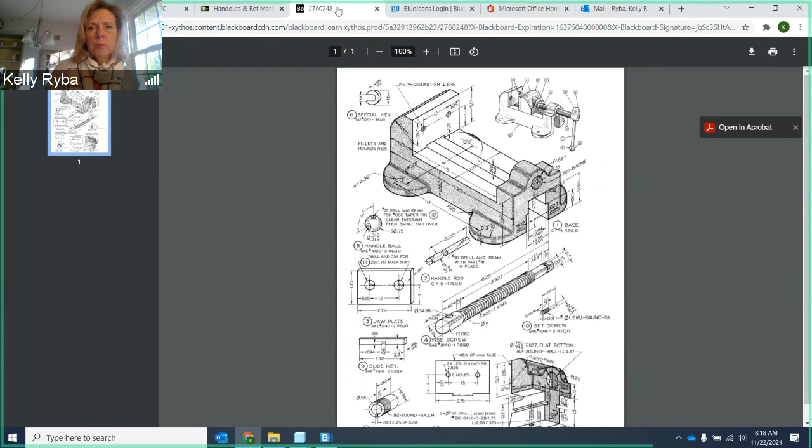So for the first draft drawings, and when you create your model, you're going to be drawing to the basic sizes that are listed here, okay? And if you're wondering which one to do it for, you also have available to you a folder in here in the handouts and reference materials of the first draft drawing guides. So if you click here, for instance, we're going to be looking specifically at the base drawing today. This is what your final drawing is going to look like, okay?

So if you're wondering, okay, what numbers should I make those features to? Oh, on Kelly's guide, here it is, okay? So use this so that as you're creating your model, and ultimately when you're creating your drawing, you have all the elements that are needed, all right? I have these guides out here because you guys had Connie previous to this, so she ran things just a little bit differently, and I have different expectations. So I want to be sure that you know what I'm looking for, and I think the best way to do that is to show you.

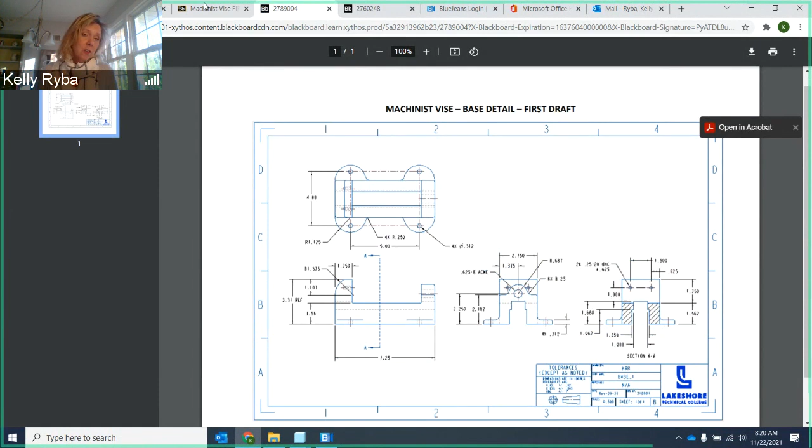Now, ultimately, you have to create the model. You have to create the final drawing. You can't just hand in my PDF here. So you may say, well, you're giving us the answer. I'm giving you what I want. And when you go to a company later on, they're going to be giving you things like, this is what I want, but you have to change this, that, and the other. Okay? So that's really what I'm doing for you here. I think you need to have good things to reference so that you can make good drawings. It's one thing to know the rules, but how is that supposed to look? What do I need that Kelly is going to be looking at and grading?

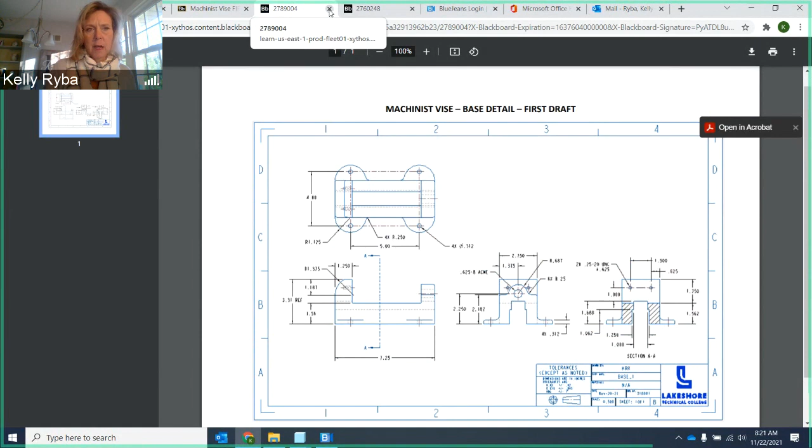So I'm kind of your boss for the company you're working for, telling you this is the format that I want. So here is what I call the drawing guide for your first draft of the base. Now there are going to be things that change on here. There's going to be a second draft on the base because we're going to be looking specifically at fits and such, okay? So that's coming soon. But right now, just focusing on first draft models and drawings, and that's what's in this drawing guides folder, okay?

So let me just go back to handouts and reference materials. In addition, the bill of material and assembly planning sheet in PDF format and Excel format are also here. These are referenced in lecture number 1. Make sure you go back and do that. That is required, and that's due tomorrow night. And then we also see a Starrett tap drill chart here. Starrett, however you want to say that. I hear it both ways.

Okay, so let's go back one level. Oopsie, actually I wanted to go to the machinist vise level. And then what I want to show you is the folder for the homework. There are, it looks like, 4, 5, 6, 7 homework assignments here, but there aren't that many due dates. I'm going to tell you that. So bill of material and assembly planning sheet here.

This is going to be due tomorrow night, all right? Or look on the calendar, depending on when you're watching this. And then you'll notice that I have 3 packets here of first draft drawings. Since there are 10 drawings, I didn't want you handing in all 10 at once.

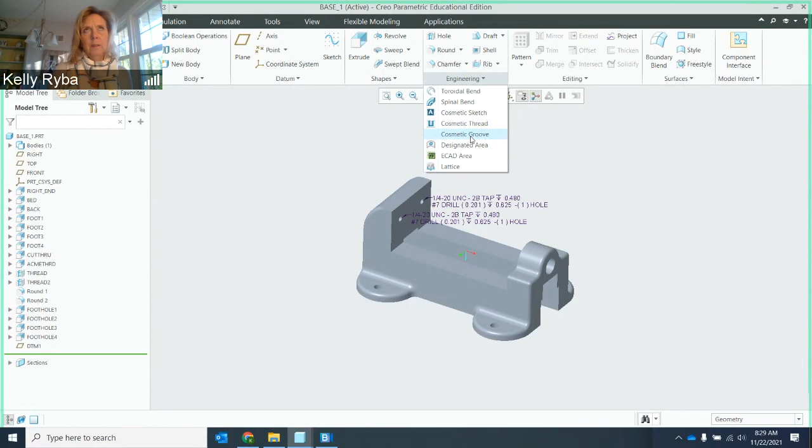All it offers you is on the diameter, it allows you to create the note, and you can just put the note in yourself. So if you wanted to go through the cosmetic threads process, go ahead. I am not going to be adhering to that because to me, that's another level of unneeded detail.

On the drawing level, I just have to make sure that my note specifies everything that's needed, because functionally, we don't need the threads there. We just need an accurate note.

In Creo, we're not going to worry about modeling or even showing a simplified version of the threads themselves. We're just going to draw the nominal size hole or nominal size shaft diameter, and our note is going to depict exactly what the thread callout will be. That's how we're going to handle that here in Creo.

Lastly, I wanted to talk about section views. Section views are going to be added for a number of our prints, and they're needed because we have to be sure that we are not dimensioning to hidden features.

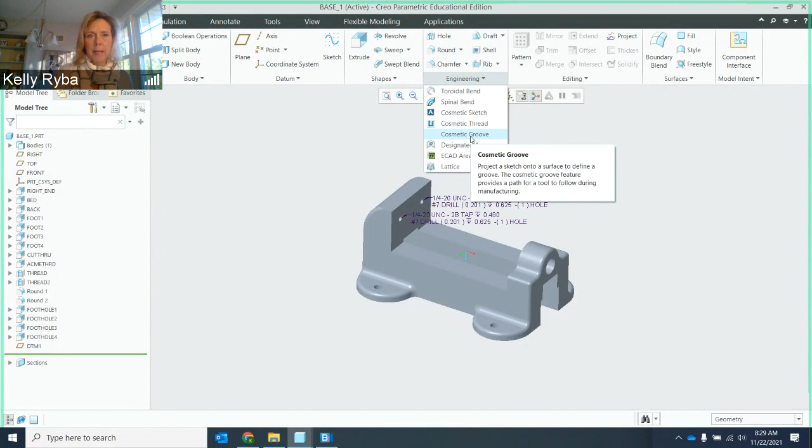There are two places where they're specifically needed, and that's going to be in the base, which I have up here and already modeled, and we're also going to be using them in the sliding jaw and maybe one or two other places.

I want to preface this: as we are creating our models, we will need to put some datum planes in here so that when we create our section views later on, we make sure we have the datum planes already set up in the model.

It's harder to do it in the drawing itself, so we have to kind of think ahead. If you forget to do it, you can always go back to the model, add it, save it, and it'll come up in our drawing because we know they're parametric. So that's something to consider as well.

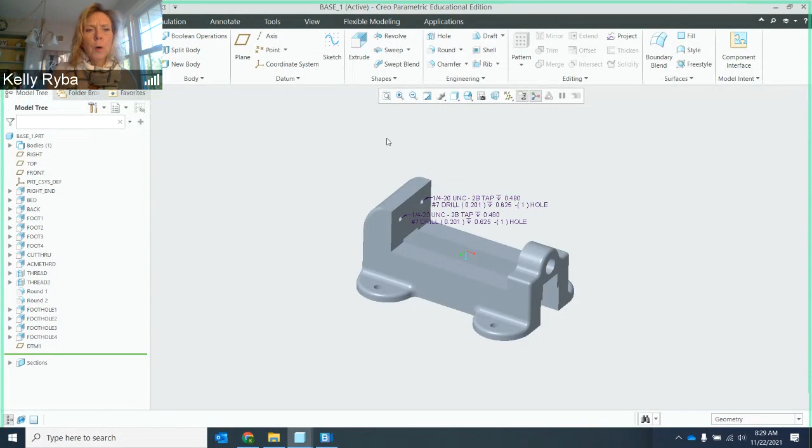I just want to make sure. All right, so a couple things here. I created my model for my base, so I'm starting here with my base model. Basically, as we look around here, this mimics exactly everything that I have on my pictorial view here.

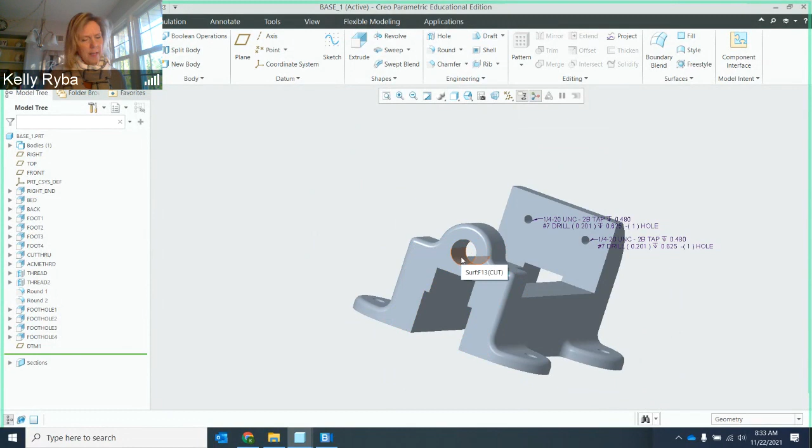When I created this hole right here, this is the Acme thread. I created it to a size of 5/8 of an inch, 0.625 diameter. Notice that there is nothing but that major diameter of that thread there.

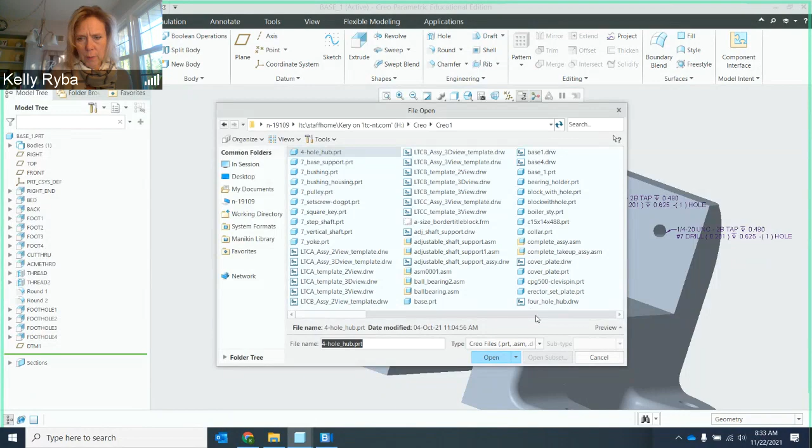When we put the vise screw in place, let me open up that and show you that as well. The vise screw, the portion that is threaded - now I haven't done the drawing for this one just yet, but this portion is not modeled with teeth.

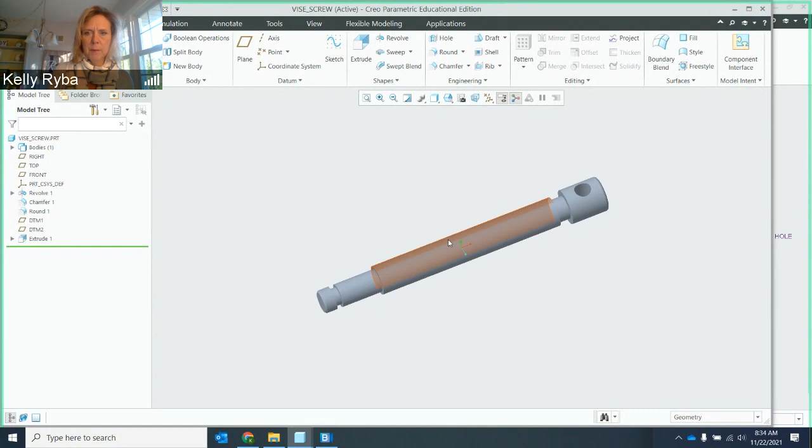But when I create the drawing, I am going to point to this section and it is going to have the callout for the Acme threads that would correspond and mate with this hole right here. So again, notes only is how we're gonna call that out.

If you wanted to take the time and go through it, that's totally up to you. No extra credit, no extra points, no nothing for that, because to me, it's not time spent efficiently. We have to kind of manage our time like this - there are due dates here, and there's what do we need to manufacture the part?

We need to know how far, we need to know where it's located, and we can get that across without having to model to that level of detail. So notes only for threads, whether they're external or internal.

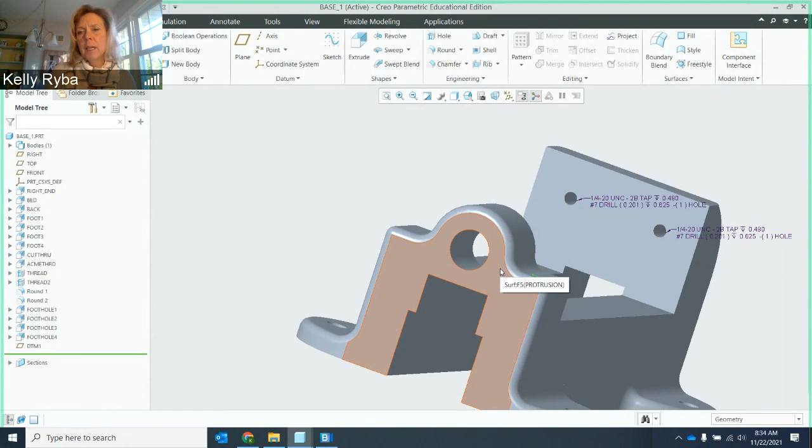Now, you'll notice here too, I'm gonna actually use this as an example. I put this threaded hole in as the hole wizard. And you'll notice that it has the full callout here, but it doesn't show the threads - cosmetic only. All right, so that's the deal there.

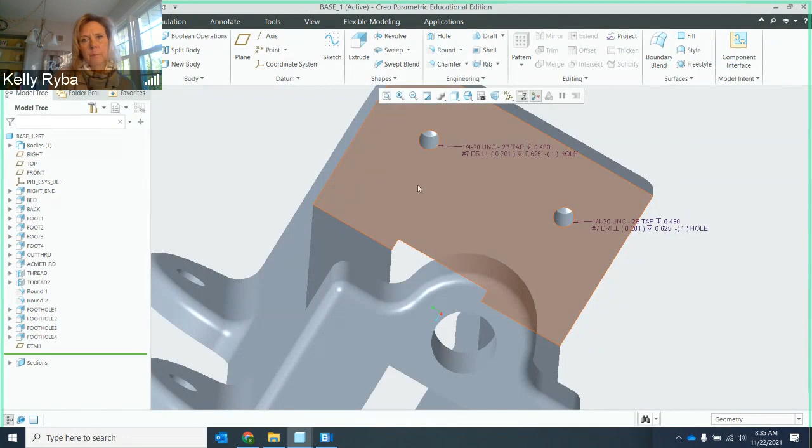Now, as I look at my detail drawing for the base - detail drawing for the base. Let me go back over. Actually, let me minimize this.

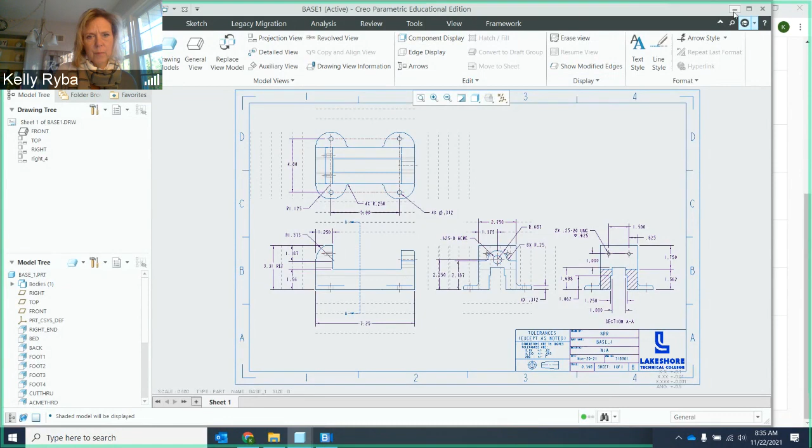Out of that. Here is my detail drawing. Oh, this is this guy. I actually wanted the - I wanted this one. Okay, no, I don't want that one. Dang it. I need and want my machinist vise, handouts and reference. I want the drawing guide for the base.

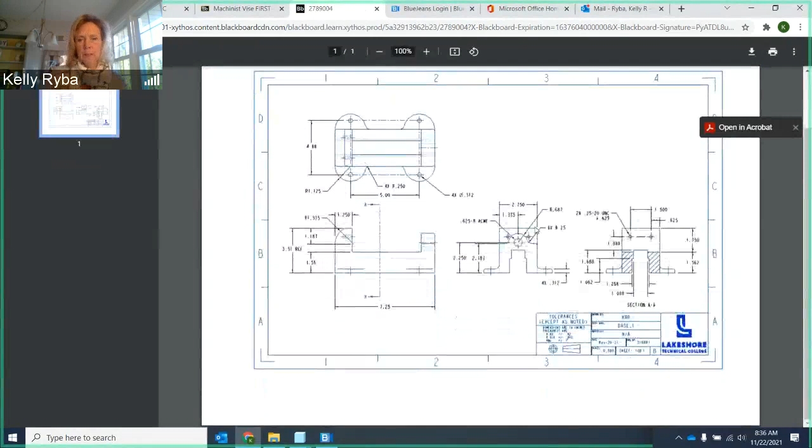I want this one. Okay, I want this guy right here. Now, you'll notice that I have a section view right over here.

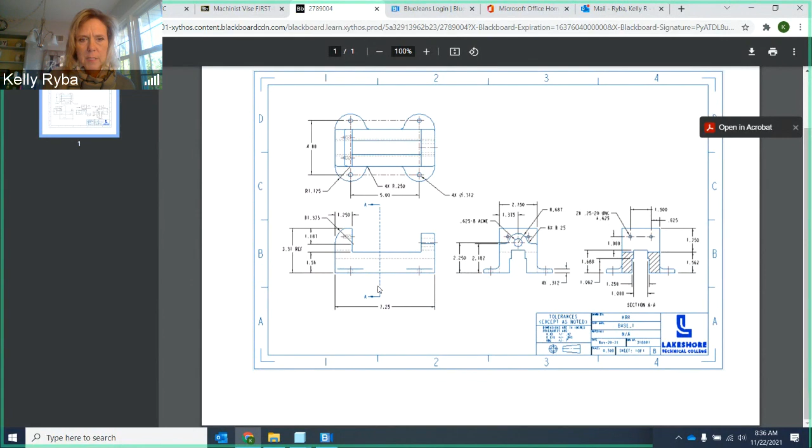Now, as I'm in my model, I'm going to think ahead. If you don't do this until you start your drawing, you can always go back to the model and create it. But I'm going to show you how I put in a datum plane for the placement of the actual section. So let's go back to this guy right here.

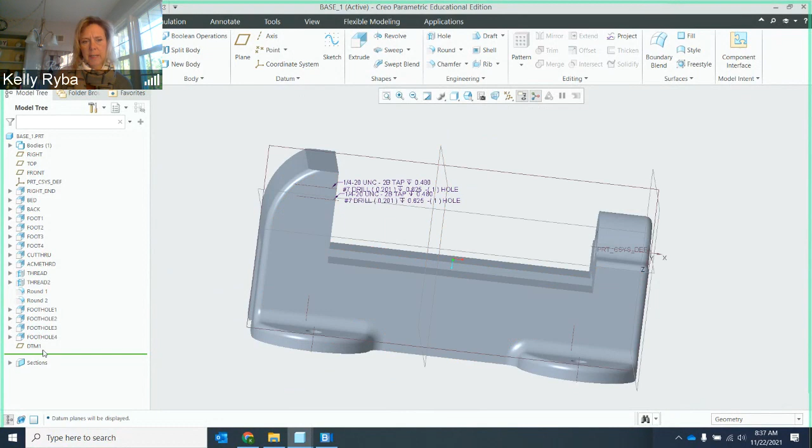Now I have my datum plane in there, and it's in between this area right here on what I call the bed. And that datum plane, if I show my datum planes, it's this one right here, called datum plane number 1.

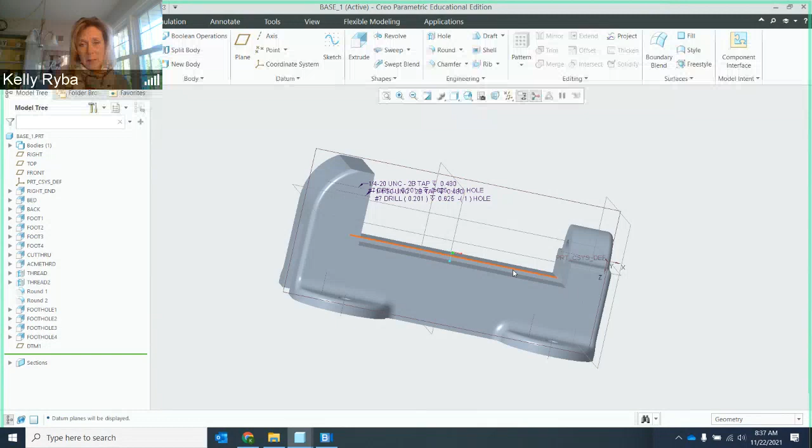Now, if my section corresponds to an existing standard plane, so if it's top, front, or right side, I don't have to do this because I can select it in my drawing. But if it doesn't, like in this case, it needs to be along the bed here somewhere, then I need to put it in place. So what I'm going to do is show you how to put a datum plane in place, and it's really simple.

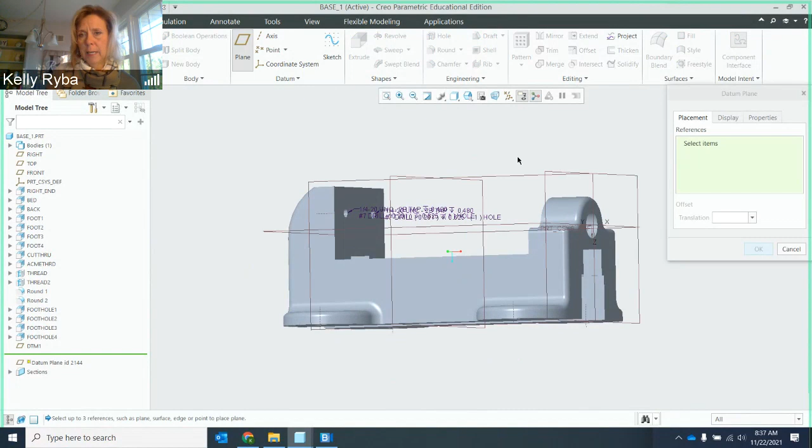All I'm going to do is click on the plane, and I need to figure out where a reference plane or surface is that I want to go in relationship to. So I'm going to say I want it to be in relationship to that face right there.

So that's surface 7, and I want this plane to be offset a distance into where that bed is. I'm going to leave this at offset, but I could do a through, a parallel, a normal, a midplane, whatever it might be. So I'm going to do offset, leave it as is.

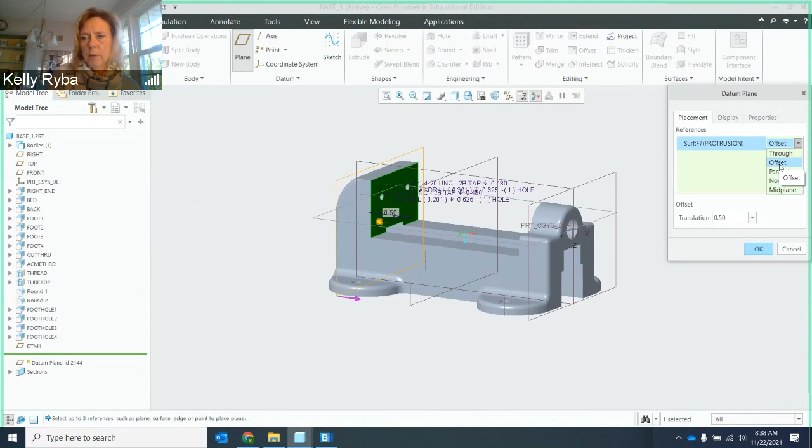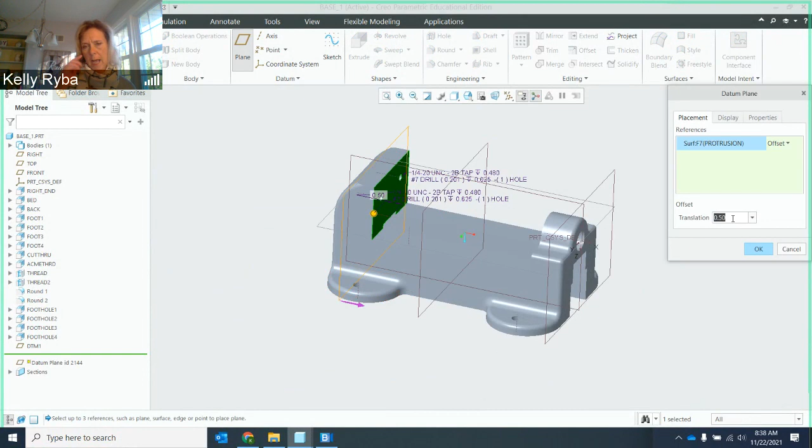And then you'll notice now there is a purple arrow. That purple arrow is telling us the direction that whatever number we put is going to go from that reference plane, surface F7, and it's going to go to the right. So that means I want this to go to the right into my bed.

Now, I think what I put last time was either 2.5 or 2 or something like that. So I'm going to offset it so we can see the difference. I'm going to put it at 2.75, and I'm going to hit enter. It went the opposite way, it went to the left. Dang it, we're going to try that again.

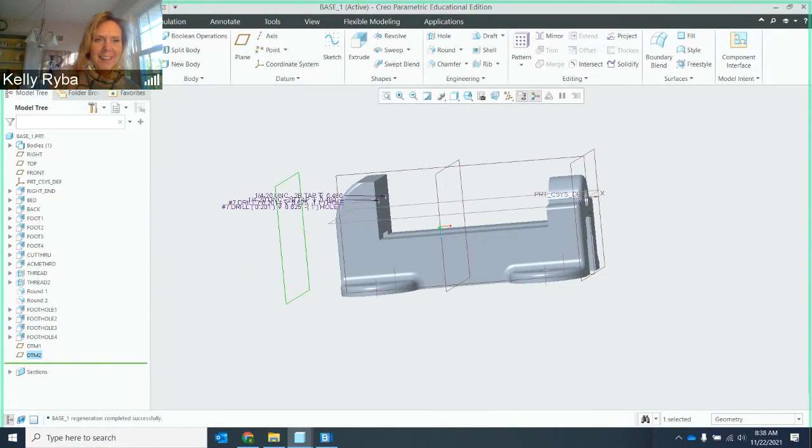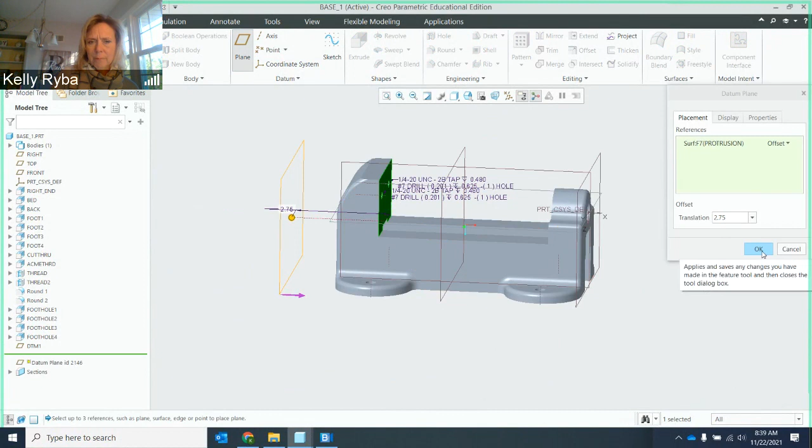This is the beauty, the challenge of Creo sometimes, or any CAD system. That means I have to put a negative in front of the number. So I'm going to select my surface, I'm going to have offset, and I'm going to do negative 2.75. You little thing, right? Negative 2.75. There it goes. Okay, now I don't understand why it showed the picture originally over here, but whatever.

But now you'll notice that I have an offset right here. This was the new plane that was created, and this is DTM, datum plane number 2, or datum 2. So now I have that plane in there. I'm going to file, I'm going to save.

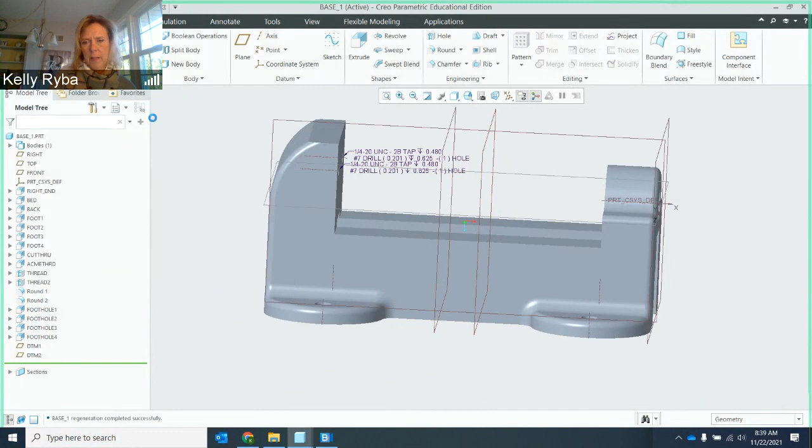So if I go to my drawing of this base, that's right here. I'm going to turn off my planes first, and I'm going to go over here and look, and I'm going to turn my datum planes back on. So you'll notice in this view, I have a plane right where my cutting plane is. That was the original datum plane that I put in there that was used for the section.

Now we're showing the second plane here. This is the one I just put in at the 2.75, from this surface over to the right. And then I can turn those off if I don't need them, and they go away. All right, so now I've got that plane in there.

And what I'm going to do is demonstrate how to make another view.

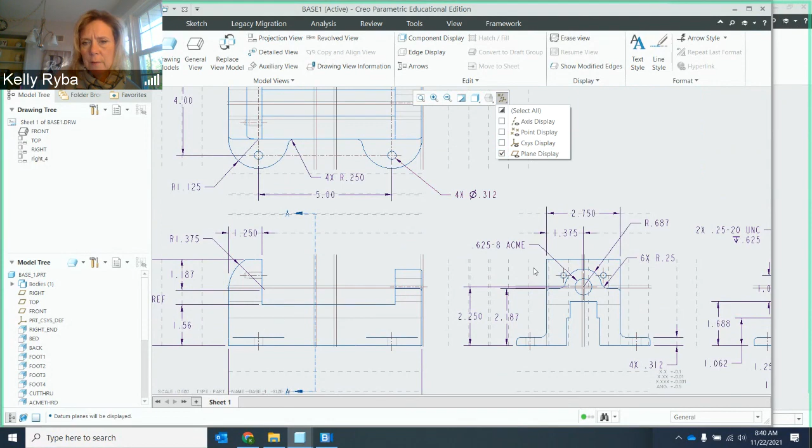Now, I'm not going to use this view in my drawing because I already have it right here. But what I'm going to do is show you the process for which you would take. So I'm going to create a section view through the new plane that I created. But I first have to have a view that's there already.

So originally this border, this is a B-size border, had 3 views. It was a 3-view B-size border, and it put my right, front, and top views in there. But now I needed, in addition, another view.

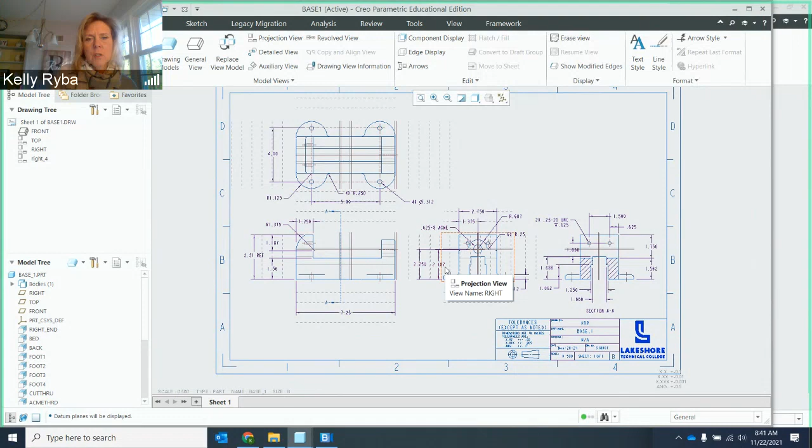So what I do is, off of whatever view I want to project from, I click here, and this box comes up. Now, we've used the first 2 here, whether it's edit the definition or the properties of that view, or looking at the dimensions, the center lines, and the annotation of the view. Now to the right, this projection view, I can actually create one on the fly.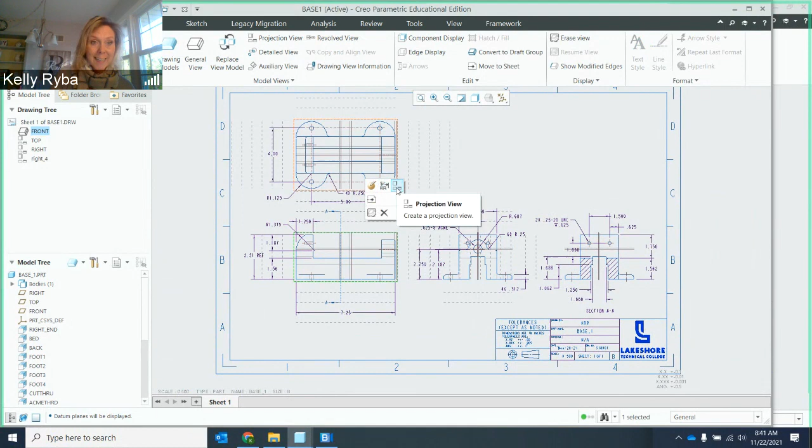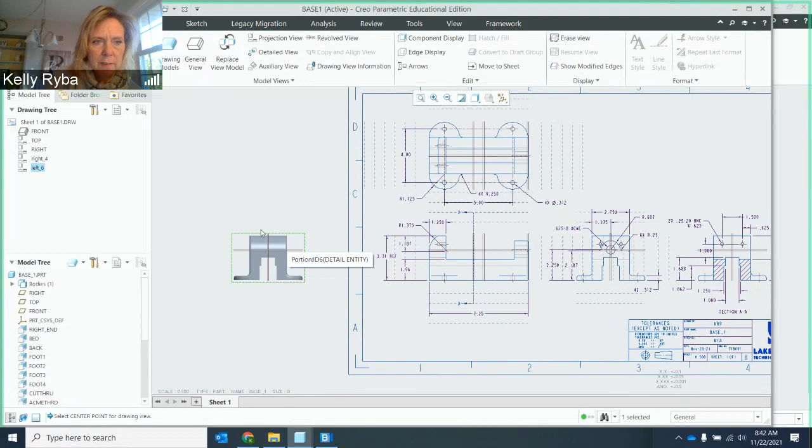So I click, and you'll notice I'm just pushing my mouse around here, and I'm going to go over to the left. In this case, I'm going to go off of the drawing border, just because I have room over here, and create this. And it just creates my view for me, piece of cake. When I left click, it just leaves it there. Now what I'm going to do is click on this, double click on it, and I get my drawing view menu to come up.

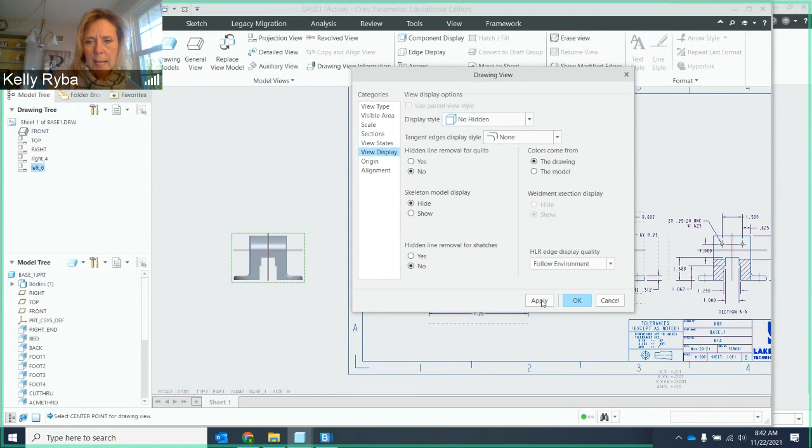The first thing I'm going to do is go to the view display, and I'm not going to follow the environment. I'm going to say hidden lines. Actually, I'm going to change that, I'm going to say no hidden, because this is going to be a section view, so I don't put hidden features in a section view. And then as far as for the tangent edges, because I do have these, this is a cast piece, I'm going to say none when I have my hidden view here, or when I have my section view. And then I'm going to say apply. That looks pretty good to me, and I'm going to say okay.

Now, this is just a view of this back side, this right side. So if I look, this is in projection, this is in projection. I took the hidden lines away so we don't see any of that stuff. I want to create a section view now.

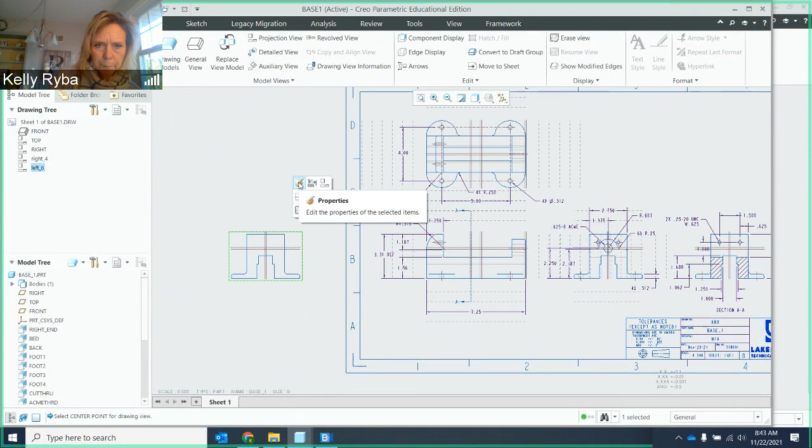So I'm going to click on that view, and go back to the properties of that view. I'm going to go to sections, 2D cross section, and add. And I'm going to create new. Click on that, and it's going to be a planar single, so that's exactly what I want, and I can say done.

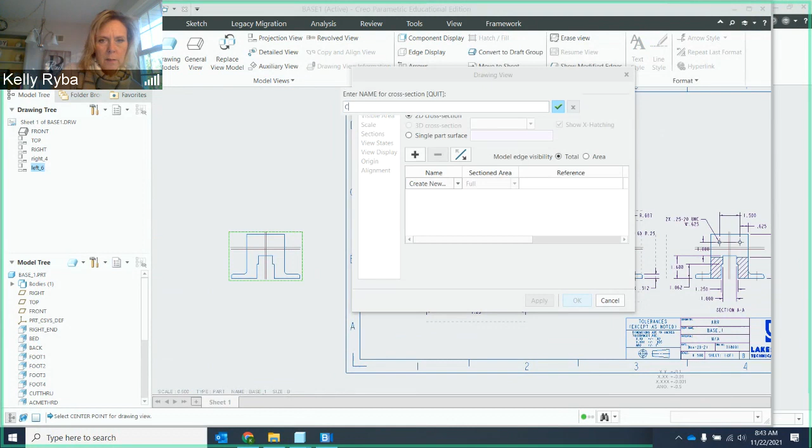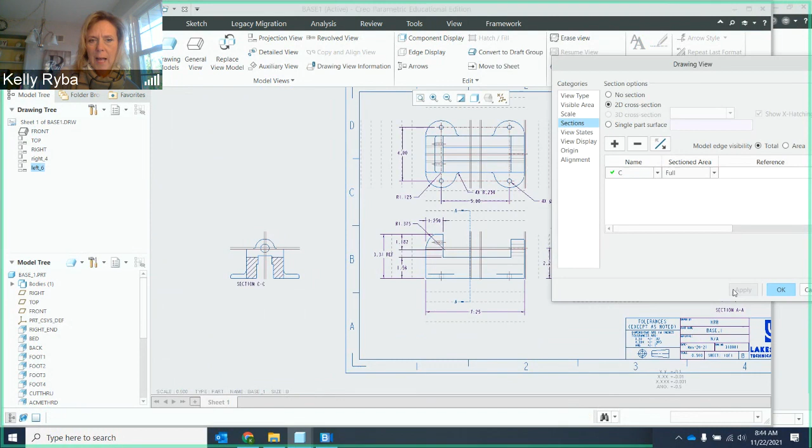Then I'm going to enter in the name. I'm going to call it C because I haven't used that letter yet. I did a B when I was practicing, so I'll do a C. I do OK, and then I'm going to click the plane that I want it to be associated with, and that plane is right here in the front view. I'm going to click it right there. And then it says full, it has a green check by it, and I'm going to hit apply. There it is, okay, there it is.

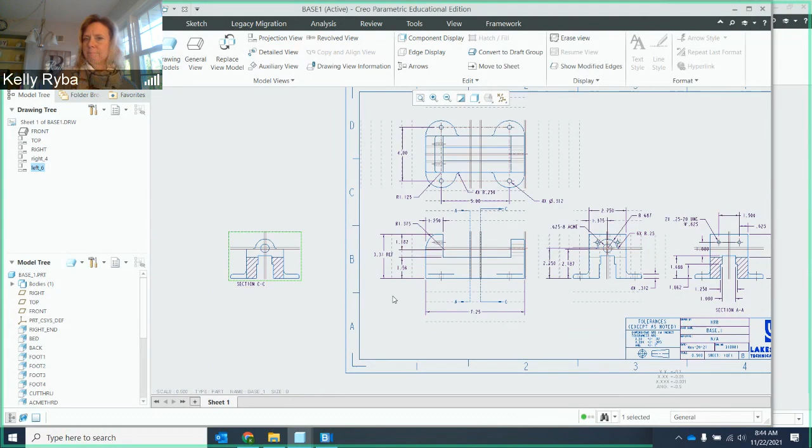Now basically I did a section. I'm on this side of it, so it's looking in that orientation. Once I have this in place, I need to go to my layout tab, and it's here, and I need to put my arrows in place. I'm going to click this view to put the arrows in. Here's my section C, and it put it in place for me. And then now I can add any dimensions or information that I want to add here.

Now I'm not going to keep this one in here because I don't need it. I did a section A, and that was my original one, pointing in the opposite direction, going in that direction, because I chose that one so I could dimension my threaded holes and their location in that view.

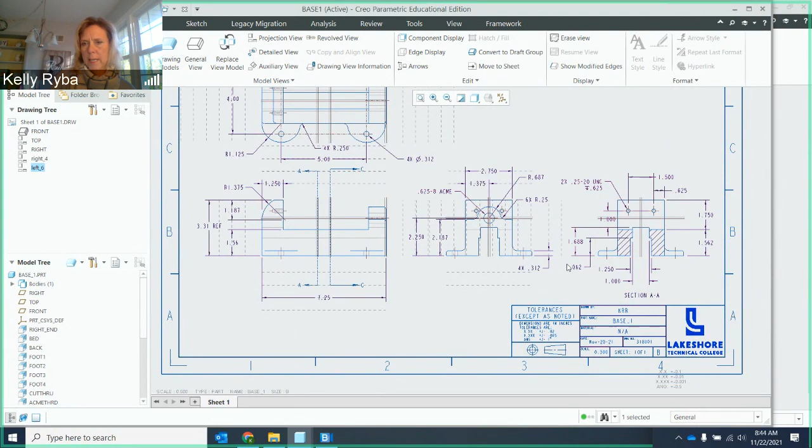So that was a better view of it. But I wanted to, for demonstration purposes, show you how to put that section view in, making sure that prior to I have the plane in my view, in my model, in the place that I want it to be.

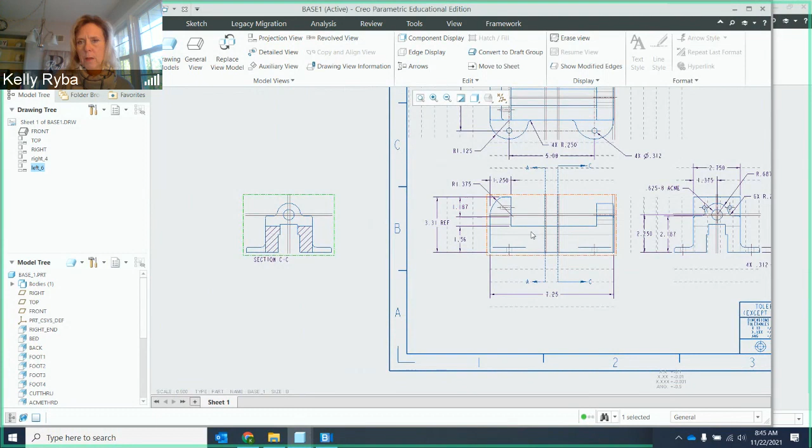To create that extra view, since it's going to come in standard with 3 views here, I have to first create the extra view. I do that by clicking on the front view and this right most projection view icon here. Click on that, and now it gives me that option. I can go wherever I want, and I get that extra view.

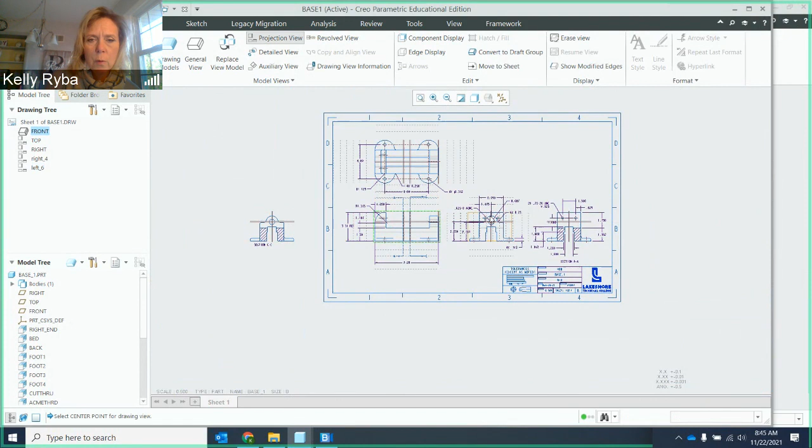Then I double click on that, and I need to change the view display to no hidden, because this is going to be a section view, and none on my tangent edges. Apply. And then we can see what it looks like. That looks good, and that's okay.

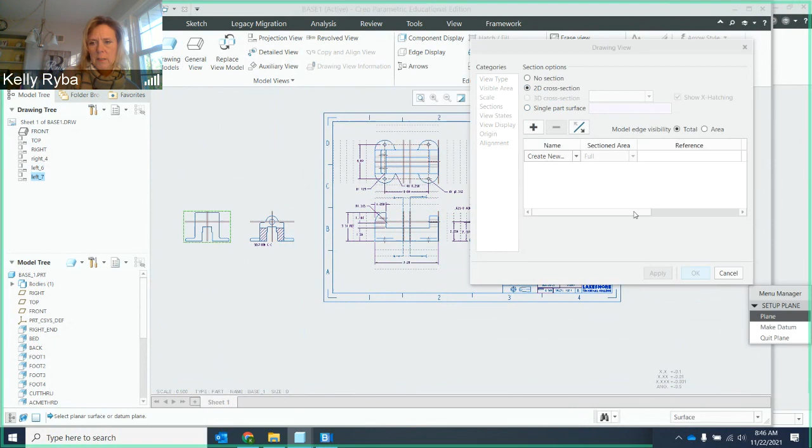And then I go back into it. I guess I could have stayed in there. I go to sections, 2D cross section, plus to add one, create new, and then don't forget down here you've got to say done. There's nothing to do, and then you're going to do, for instance, D, enter, plane, and I got to pick the plane.

The plane has to be visible. Well, I'll pick this plane. I don't know, it's probably going to say no, you can't do that. Yeah, because it's in the wrong orientation. But once I pick my plane and I hit apply...

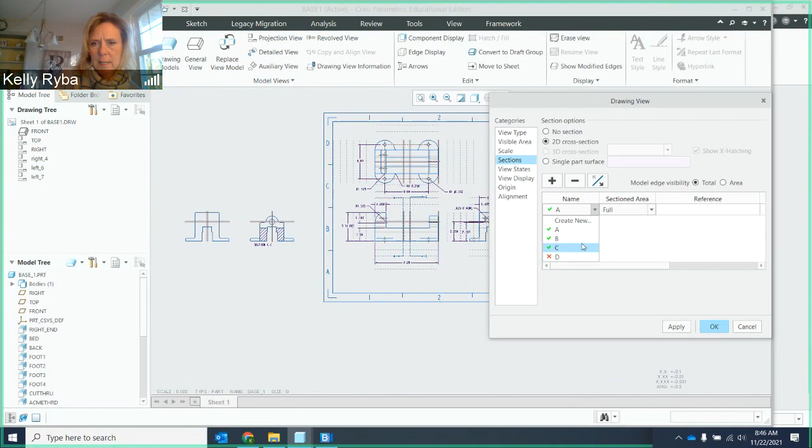Yeah, I want to get rid of that. There we go. Plus, create new. Done. I don't want to spend a lot of time with this because I already did. So, C, no, I did C, D. Let's do E. Okay, and I need to find that plane then.

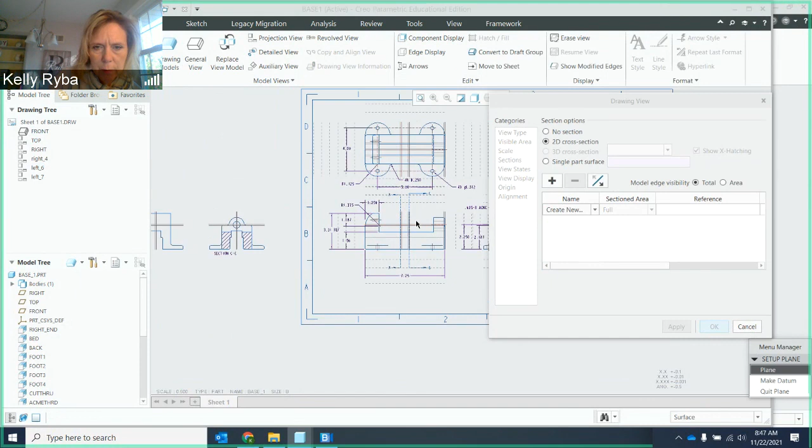Because I called it out as a planar, I have to use a plane. So I'll just pick this one. Yeah, it's going to say, it's going to do it. Why? Oh, it is. It's just going to do another one over that same place.

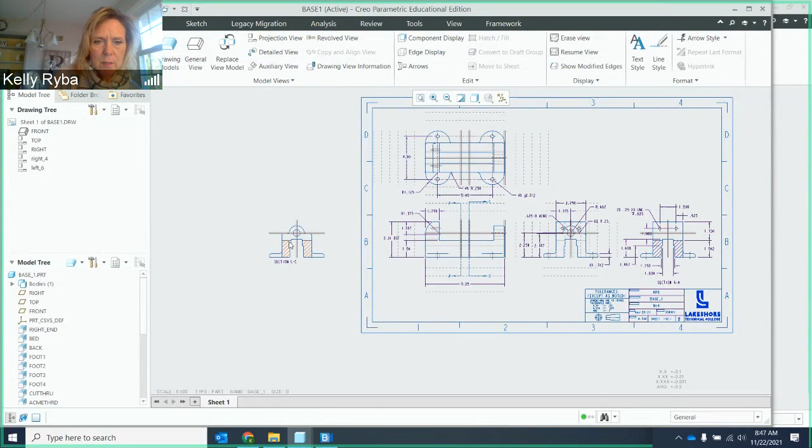I'm not going to add the arrows. I'm actually going to get rid of those in this drawing because they're not required. This is not a view that you're creating, unless you wanted to, but I just wanted to show that process. So I'm going to get rid of these guys, rid of this view, delete, and it got rid of the arrows as well.

Okay, so I'm going to also clean up. I'm going to get rid of all of my plane views here, and then I'm going to zoom in here.

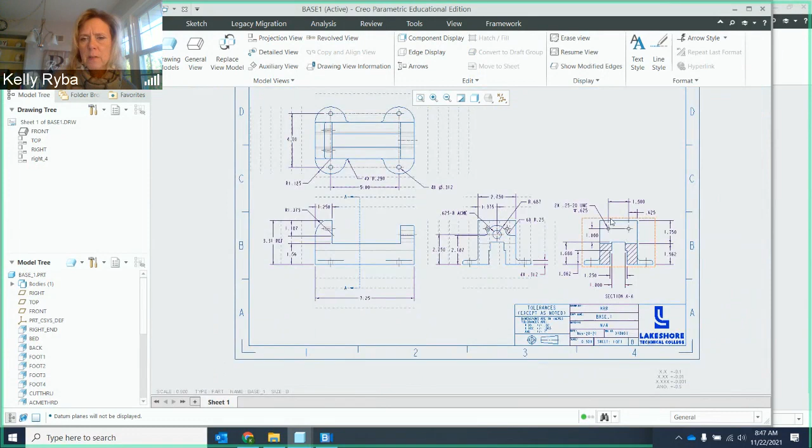Okay, so let's look at a couple things on the drawing here. Notice that we have our section view. This is section AA. Again, I picked this one because of the ease of being able to get some other drawings or other dimensions in this view. It was a better view that I could take advantage of.

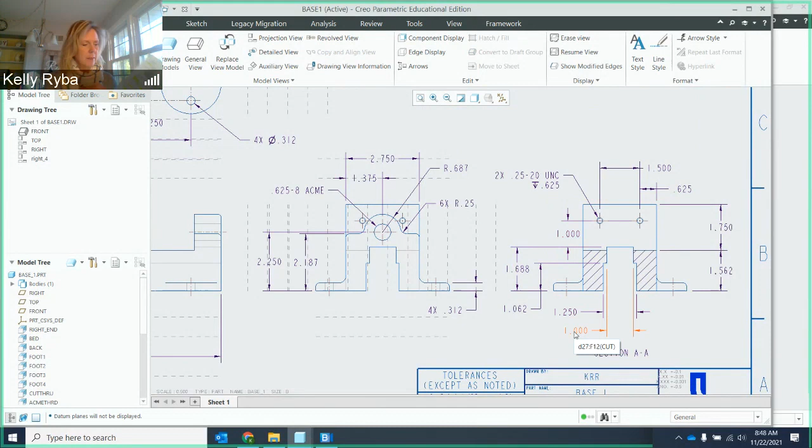Notice how I drew the width, because these are the nominal dimensions coming from the model. I drew the width of the slots here that are created, or the cutouts, to their nominal size, and they're being dimensioned to their nominal size right now, even though on the drawing here, there are limits. I'm drawing them to the nominal size, and I'm dimensioning them in the first draft to the nominal size.

So if there is any place on here that has limits, you're going to notice that when you create it, the dimensions that are on my drawing guide, they are to either one of those dimensions or a middle dimension. And I usually tried to pick dimensions that were to a nominal size.

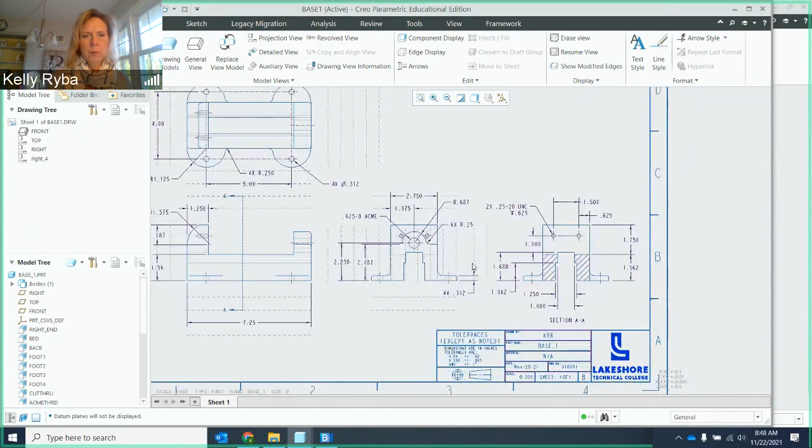So for instance, on the width of the cutout, the 1-inch part of the cutout here, this is actually a limit on here of 1.004 to 1.000. So I drew it at 1 inch, nominal, and so on. You'll notice that play out as you dimension and such.

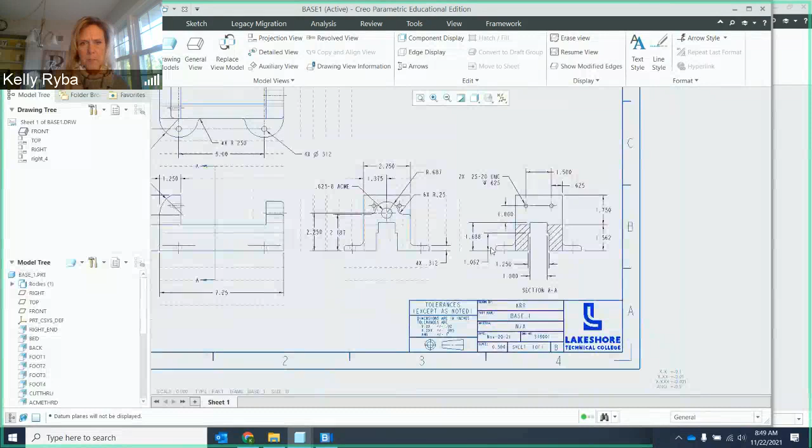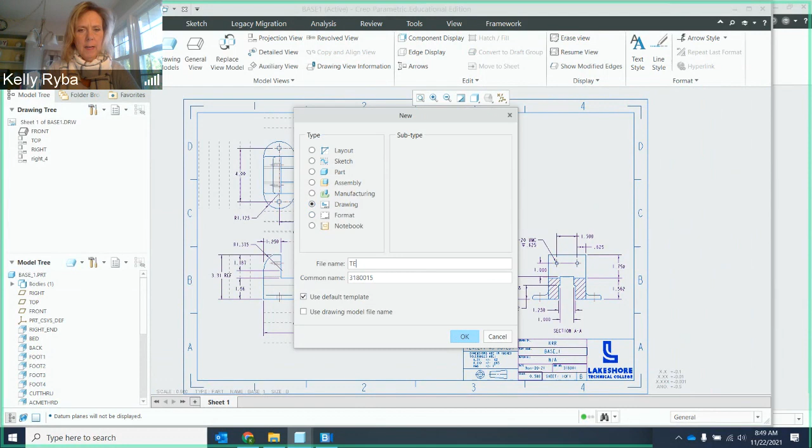Okay. Now I need to just find, I'll browse. I guess it really doesn't matter. I'll just do base 1 is fine. Base 1. And then I'm going to browse to my borders. Okay, the templates are going to come up. So you'll notice here that I have, I'm going to do a B-size 3 view, totally fine. And I'm going to do okay.

And no, not the assembly, sorry. I want the template 3 view. There we go. B-size template 3 view. That's for the detail. And then open. And I'm going to say okay. And it puts it on the border for me. All right. Now, a couple things. Notice the orientation isn't right. And that's going to all depend on how you set up your planes, but that's okay. We can change that in a little bit and I'll show you that.

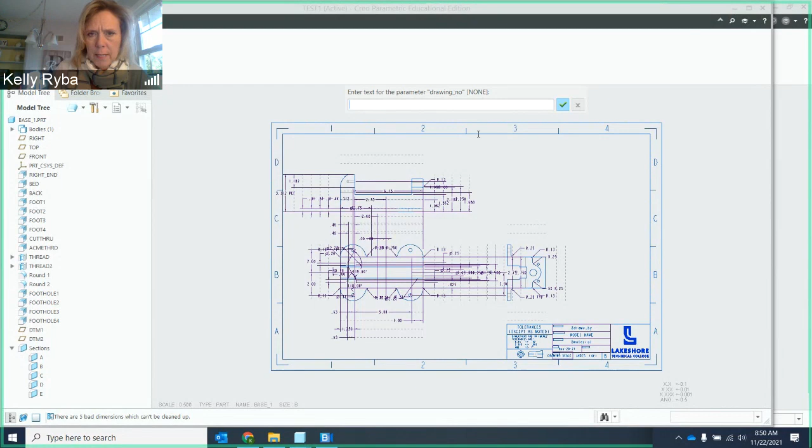You'll notice up here, it's wanting me to enter this information. This is drawing number. So 3180015. Okay. Again, I'm not using this one. And then drawn by KRR. Then it's going to ask for the material, cast iron. Okay, and it fills in the title block for me.

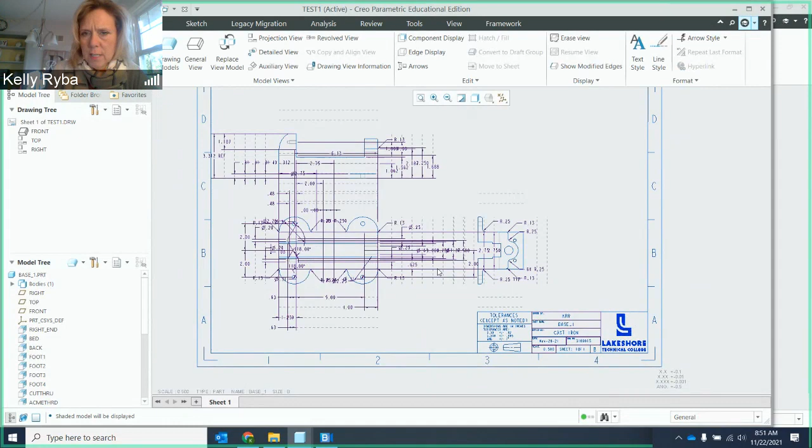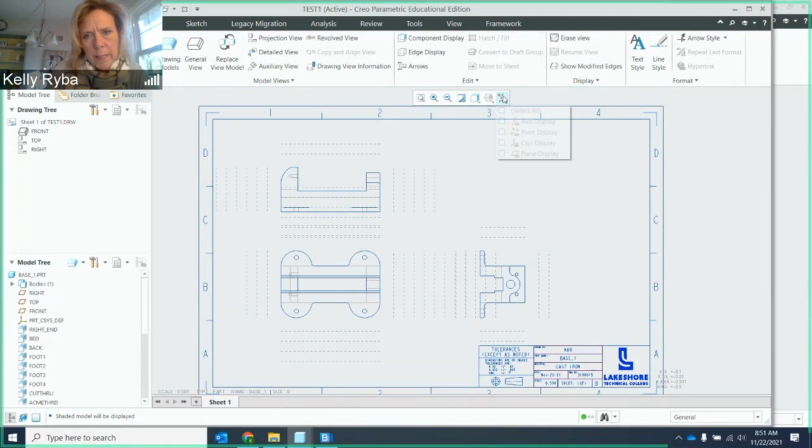Okay, now orientation here. Let's just kind of clean this up first before I worry about orientation. So I'm going to go down to the lower right hand corner here, change this to annotation, and the first thing I'm going to do is create a box around all of the annotation and delete and get rid of it. Okay, then I need to change this back to general so I can do some other stuff. And the other thing, it looks like my planes are already turned off. If they aren't, go to select on and off here and toggle those off.

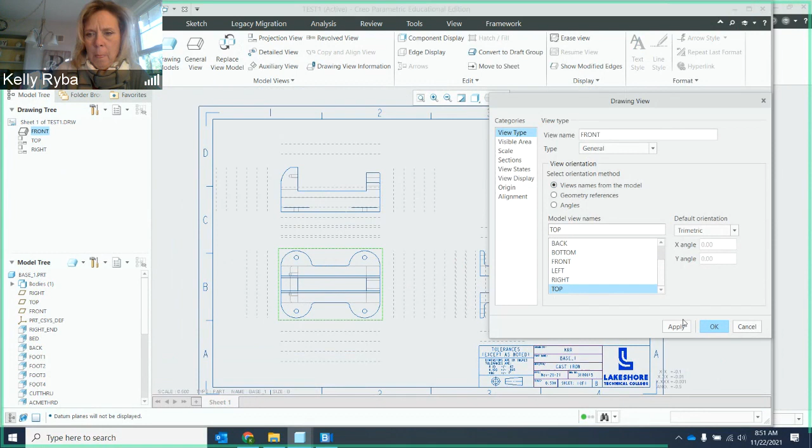Then what I'm going to do is I need these to kind of flip each other, right, and have the right view. So I'm going to double click on what would be my front view. And instead of the front view, I'm going to select the top view as it shows it here. And it's going to be apply. And it says, yep, it's going to switch things around. That's totally fine. And now this makes more sense to me, right? This looks better. So I've got a true top view, front view, and a right side view. So this all looks good now. And now I can hit OK.

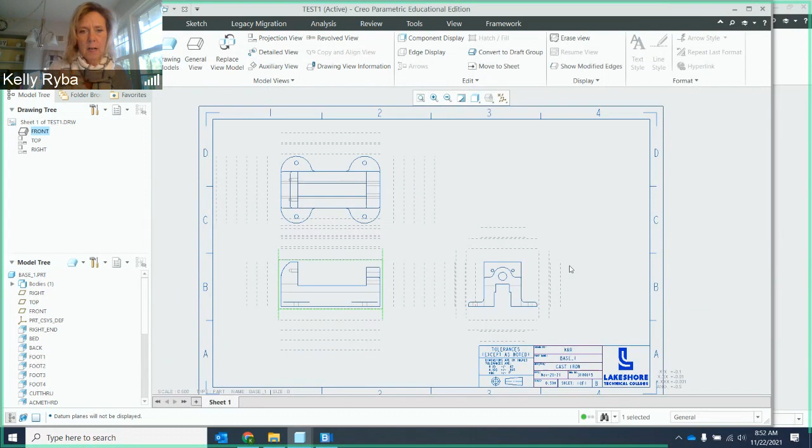So that's how you change the orientation if it doesn't come in quite right. Try to think ahead of time so that your front view matches where your front plane is. But if it doesn't, you can change it. All right, it's not a huge deal. And then you will go through the process of creating the extra view. So again, on here, creating that extra view, and this time I'm just going to go over to the right.

Okay, and again, double click on that. Go to my view display. I want no hidden because it's going to be a section view. None of those guys. Apply and OK. And then you can create the section view after that. Okay, so that's how you get started.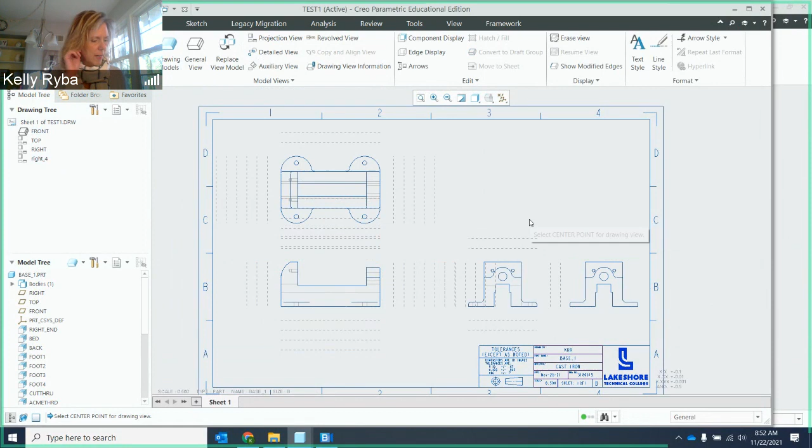And nominal sizes here, paying attention to the guide for the dimensions that you need, where to place them. But if you find a better place and you're like, nope, I know this is going to match the standard, I'm totally open to that. And then making sure you're using the LTC borders required. And also that you have everything filled in appropriately when you create this, okay?

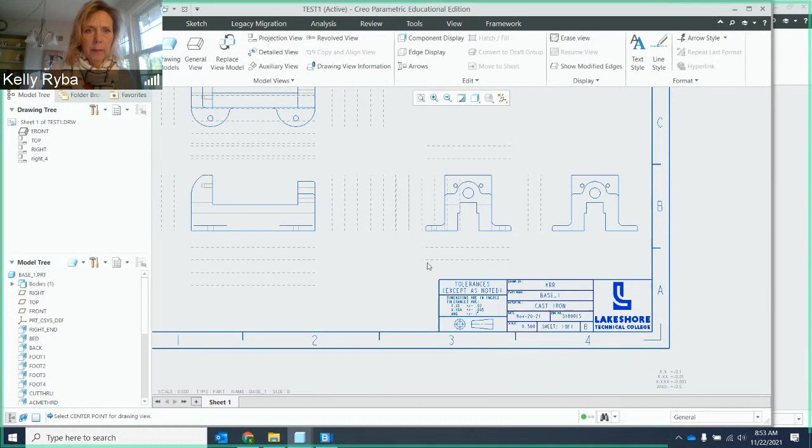One last thing about creating your models, okay? So what you want to start doing now is just start creating those models and the drawings, and the detailed drawings. I'm going to create a new part, okay? Create a new part, and this is going to be test 2. Now, the file name is test 2. That's what you're going to see it in your files as, okay? Common name, this is where I want you to put your part number. So 3180016, okay?

It's going to correspond. You're going to be looking, when you call this out, for instance, on the base, the file name is going to be base. And then your common name is going to be the part number that we decided on in our discussion. And in this case, it's 3180015. 3180015 you're going to be putting in here. This is your part number.

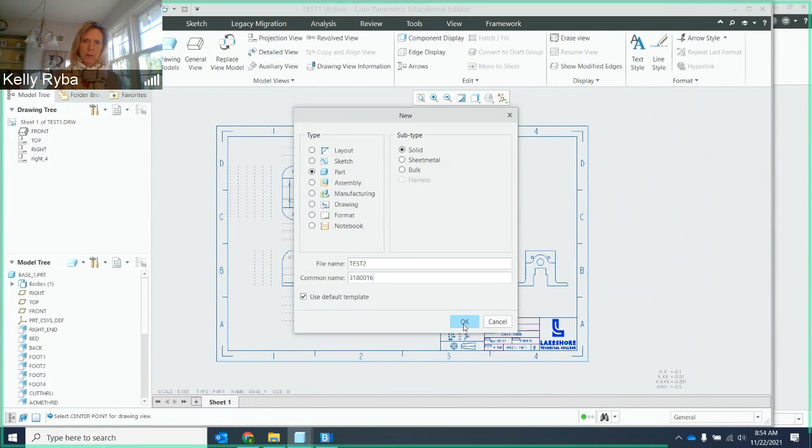Now, this is important because when you do your assembly drawing, it'll automatically populate for you up in the bill of material. If it doesn't, then I know you didn't do this part right, okay? And you're going to lose points. So I'm telling you exactly how to do that. So make sure you do that when you create the model, all right?

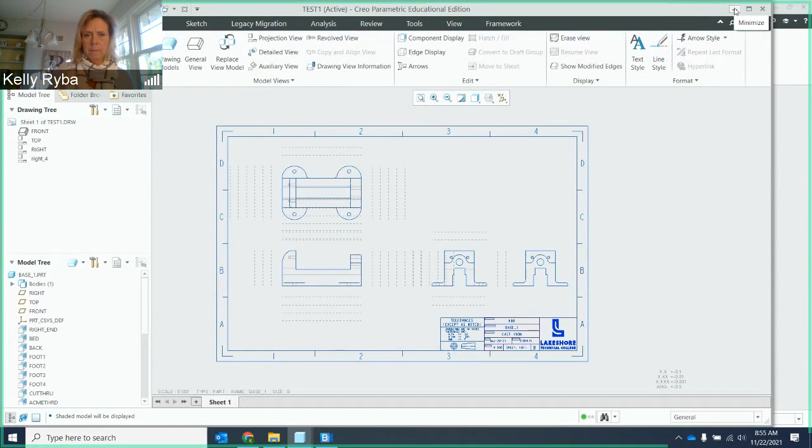So you'll find these in the Machinist Vise, Handouts and References, and there is a Machinist Vise first draft drawing guides. So you have the one for the base. The next one here is for the sliding jaw. Now I did create this one in AutoCAD. I haven't gotten my final one completely done for Creo, but the only difference that you're going to see here is that right here I have a cutout section view. You don't have to do that.

You can just do the dimension to here because it's identifying the cutting plane line that is going through for this section view over here, okay? And we're dimensioning to that, which happens to go through the set screw threaded hole location here. So you can dimension it right here without having a cutout view in there because you're actually dimensioning to the cutting plane line, which gives you your orientation there.

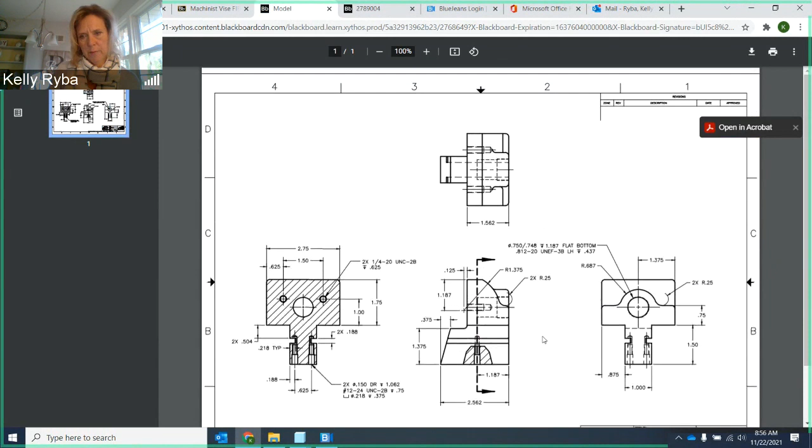So you don't need to have this little view, but you will need a section view over on this side, okay? You will need a section view over there. I don't know why that is doing that, but this is just your PDF format. So this one is on a C-size border, and that's what I found worked best for it. Now, this is not on our LTC updated one, so don't worry about that.

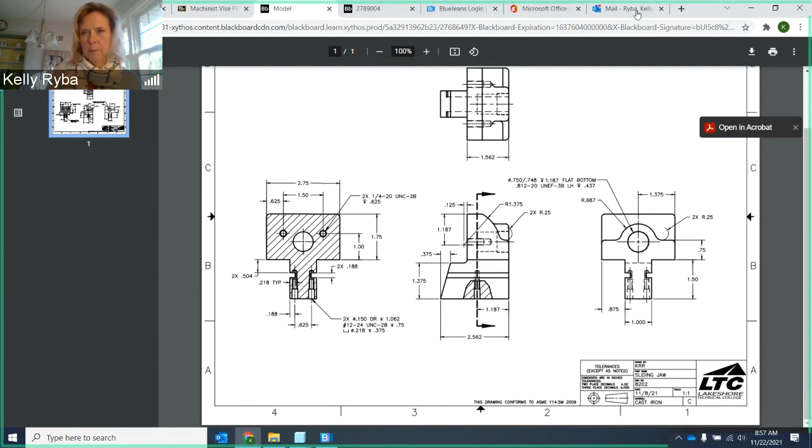You are going to use your Creo borders. And as long as you download those correctly in the format that I told you to in the process, you'll be A-okay on that. Okay. So let me get out of that one. And then you'll also notice that your third one is going to be the vise screw.

Now for this one, in this orientation, there's two things that you don't need to worry about. You don't need to worry about the detail A to make it larger, and you don't need to worry about the hidden lines. You're just going to call a note out for the Acme thread. You're going to be doing a front view and a right side view for this one. You only need to do those two views. And again, I'll update the guides as we go along. And that would be the first packet if you wanted to get started on that.

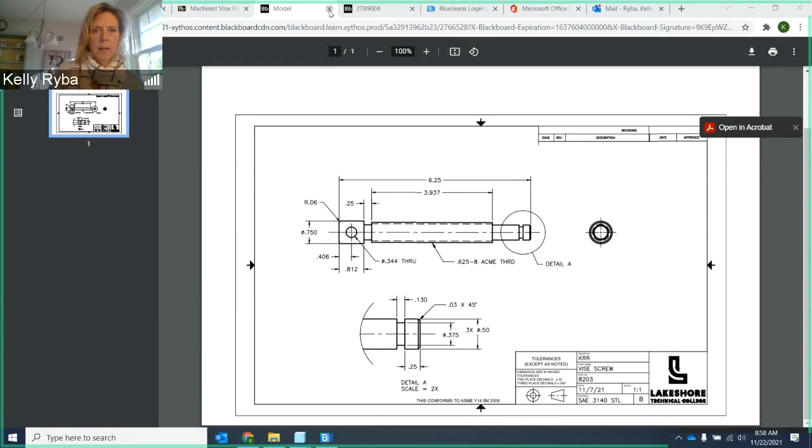Tomorrow, we're going to look more specifically at the sliding jaw and this vise screw, okay? But I wanted to get you started on getting the models created. If you have any questions as you go along, let me know, okay?

And just a couple of things before I let you go here. First and foremost, tomorrow is the bill of material and the assembly planning sheet. Go back to lecture number 1, watch it in its entirety. Lecture number 2 here is going to be posted after it's available. For me, it takes a little bit to process it, so it'll be up and in the folder. And then we're going to continue working on detailed drawings the rest of the week. The packets for the first draft detailed drawings are going to be due a week from today. So make sure you're working on the models and getting them on drawing borders.